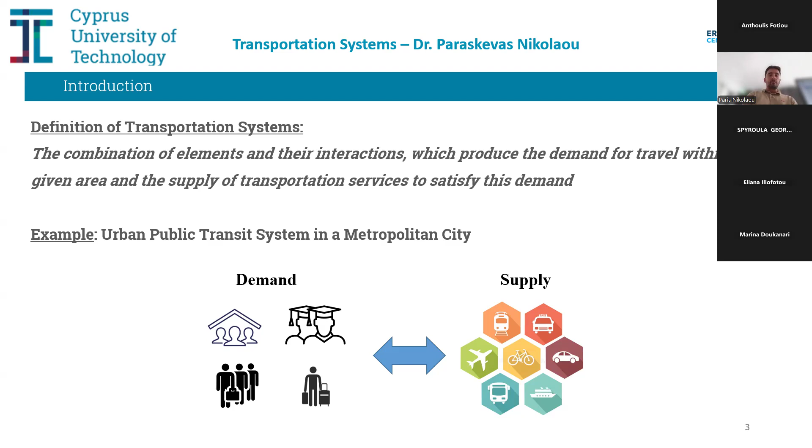So the elements of the transportation system are the commuters, the passengers of this specific transportation system, which are residents, students, tourists, and workers that desire to make a movement based on different purposes using the existing infrastructure and existing alternative modes. So the interaction between the demand for commuting and the supply of commuting services is what makes up the entire transportation system.

So a transportation system provides the necessary connectivity that enhances the interaction between people and also goods. That facilitates the movement of people and the spreading of ideas. Advances in transportation technology have made a revolution in civilization as we know it. And since ancient times, cities have developed close to physical and available terrains in order to make commuting easier for them, especially close to rivers or coastlines, etc.

So what is the evolution of the transportation system? We'll focus from the 19th century and forward, where in the 19th century you have the Industrial Revolution, steam engine technology, where you have transportation over canals, transportation of goods and passengers. Then we have the construction of railways in the 1830s. And in the 1930s, we have the Great Depression, where the US stock market dropped, and we had the decrease of oil and petroleum, where automobiles were not able to move.

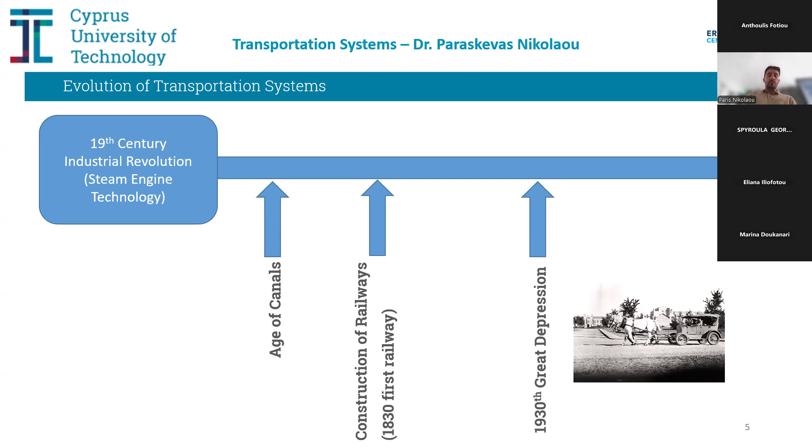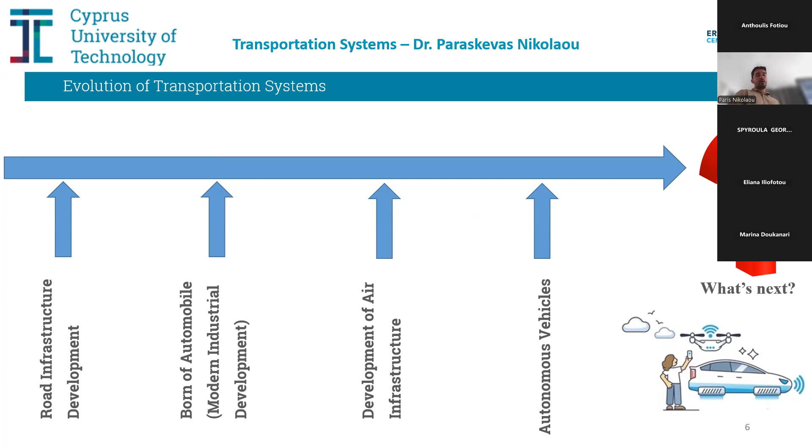So then we have further road infrastructure development, the birth of the automobile with modern industrial development, the development of air infrastructure, and autonomous vehicles. So following the evolution of the transportation system, we come to the question, what is the next step? As far as I know, in Dubai, I think they will implement a new transportation mode, which will be the mode of commuting passengers through drones.

So the dimensions of transportation: we have different dimensions of transportation, such as historical dimensions, where actually, as we mentioned, civilization evolved through the evolution of transportation systems. Economic dimension of transportation, where we have transport and economic development, which are highly related.

Social dimension, where now through the transportation systems, we have access to healthcare, welfare, and cultural events. Political dimension of transportation: it's important to also mention that during the presidency, we had one hot topic, which was the transportation problem in Cyprus. Environmental dimension, where as we know, the European Union has some regulations, some limitations on the emissions through the transportation system, which is also important to notice.

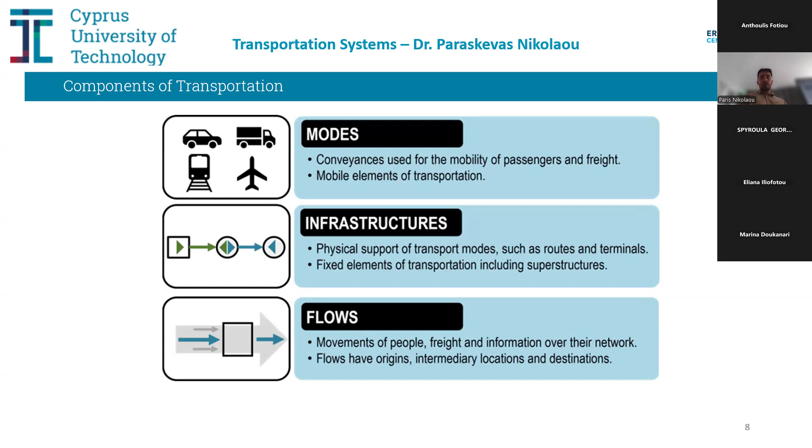The components of the transportation system: as I mentioned in the beginning, we have the modes, the alternative modes that exist in different locations, the infrastructure, the networks, the railway, the road network, etc., and the flows, which combine the movement of people and goods throughout the entire transportation system.

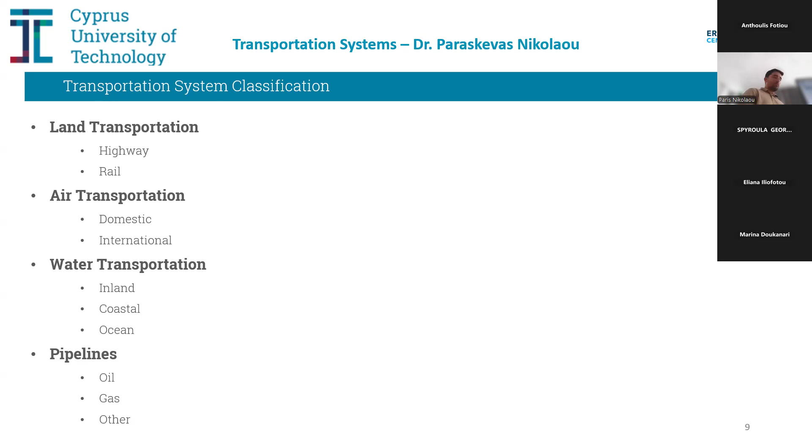The classification of the transportation system: we have different types of transportation system, which combine land transportation, air transportation, water transportation, and lastly, but also important, the pipelines, which are also considered part of the transportation system, transporting oil, gas, and other materials.

So one of the characterizations that I can say for the transportation system is that besides the modes, the different infrastructure, and the kind of objects that we transport, either people or objects, we have also the scale of the transportation system, which is urban, regional, intercity, and international, the transportation of freight and passengers, and also whether we have private ownership of the transportation system, or public, or even joint between private and public ownership.

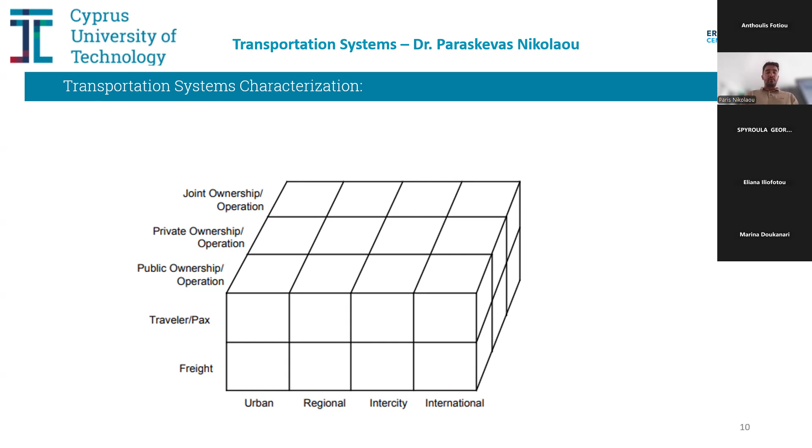An example here: the public transportation system in Cyprus, where the operators are actually private ownership, but they follow the framework that the Ministry of Transport has made for them.

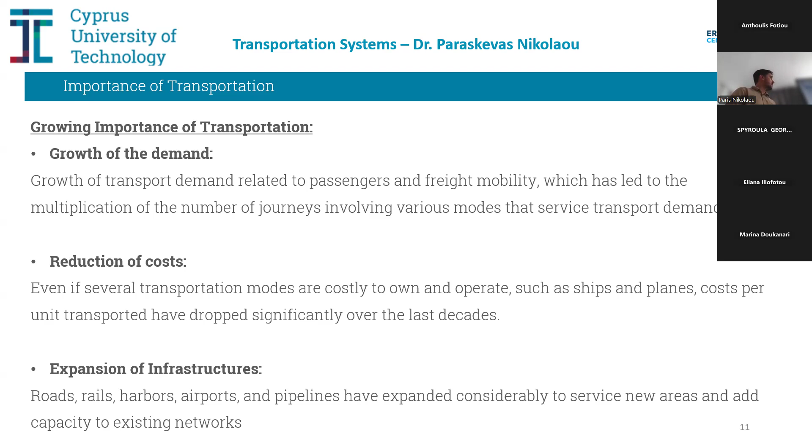So the importance of the transportation system is that growing demand is related with the growth of transportation, as many people desire to move. So we are in the position to make an evolution of the transportation system in order to fulfill the existing demand or future estimated demand. The reduction of cost using transportation modes, for example public transportation, helps us reduce our cost in contrast to using our private vehicles. And also the expansion of infrastructure, which is also a growing importance of transportation.

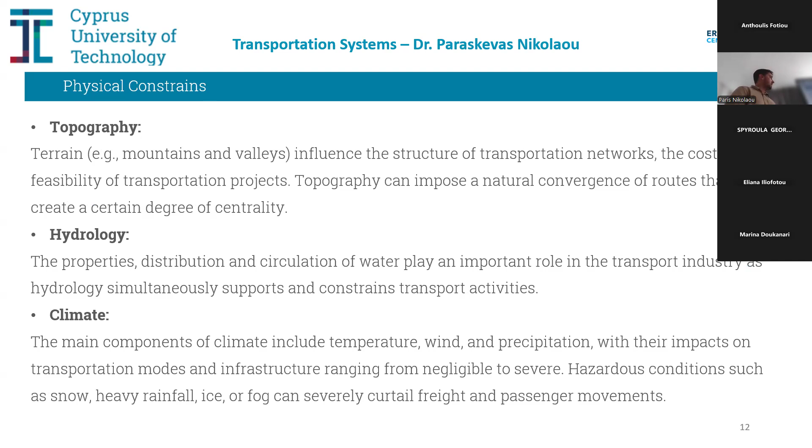So what are the physical constraints of transportation systems? The main constraints are considered as topography, where we have the terrain. For example, difficult terrains make the infrastructure of the transportation system more difficult to construct. Hydrology constraints and climate constraints.

What are the types of the transportation system? As I mentioned before, we have the public transportation system, the rail transportation system, urban, airway, freight, pipeline, intelligent transportation system, sustainable, resilient, autonomous, and space transportation systems. So as I mentioned, today we'll focus mainly on public transportation, also the intelligent transportation systems, the resilient, and the space transportation systems.

Public transportation is the provision of modes that are considered either public or joint ownership, which are provided to people in order to make their commute from different locations to different destinations. So the consideration of the public transportation system started from the demand for movement.

This specific system was enhanced during the years when we noticed that people moved from rural areas to urban areas, specifically when the secondary and tertiary sectors increased, manufacturing and other services in the urban areas. So people moved in order to find work in the urban areas, and this phenomenon is called urbanization. From urbanization began the demand for providing these people the ability and the mode for commuting. So we started to further study the public transportation system.

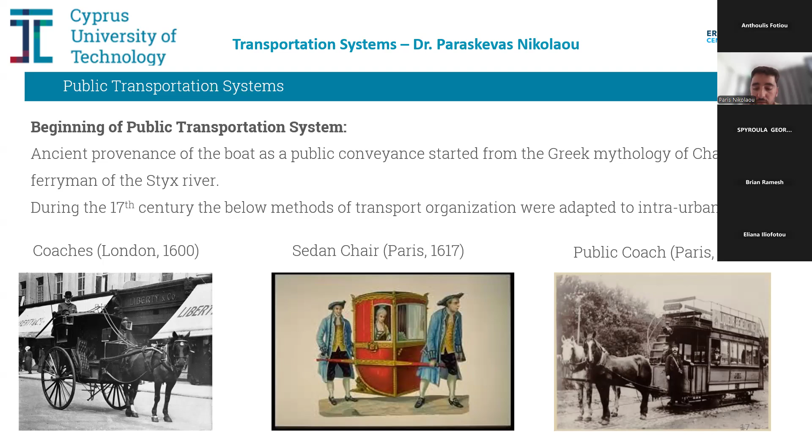We have the coaches in London at the beginning of the 17th century. Then we have the sedan chair in Paris in 1617. And also we have the public coach in Paris in 1662. So the evolution of the public transportation system is another topic that actually was considerable over the years.

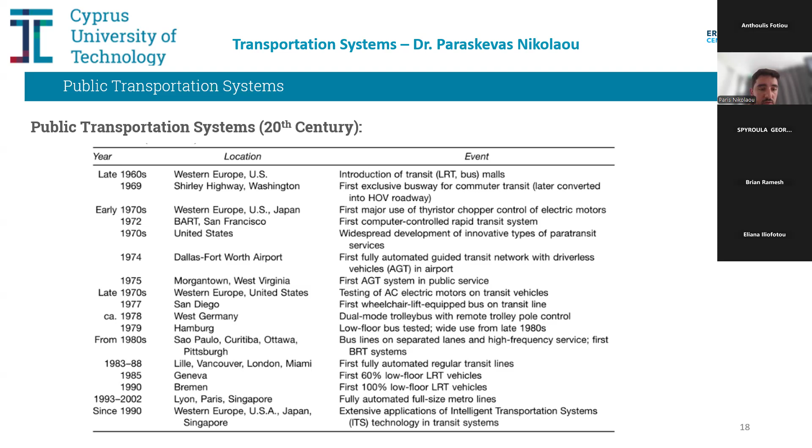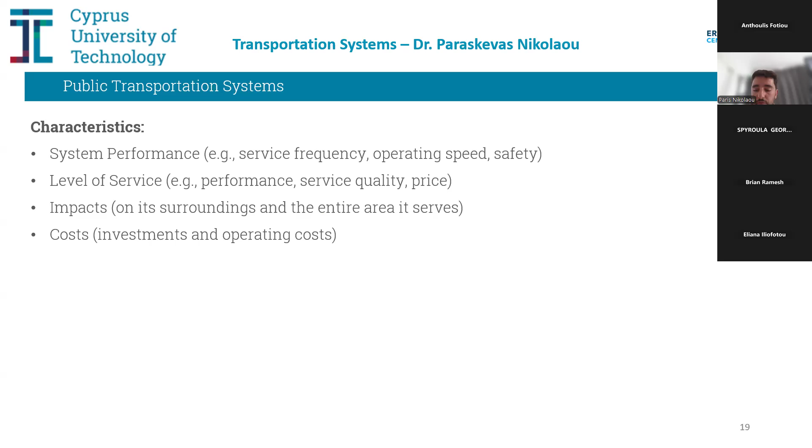So the characteristics of the public transportation system are that we have the system performance, which we measure by using service frequency, operating speed, and safety. We have the level of service, which characterizes the performance of the public transportation system: the service quality, the price. We have the impacts that the public transportation system provides over the surrounding area that it serves, and the cost, which is considered as the investments and the operating costs of the operators of the public transportation system.

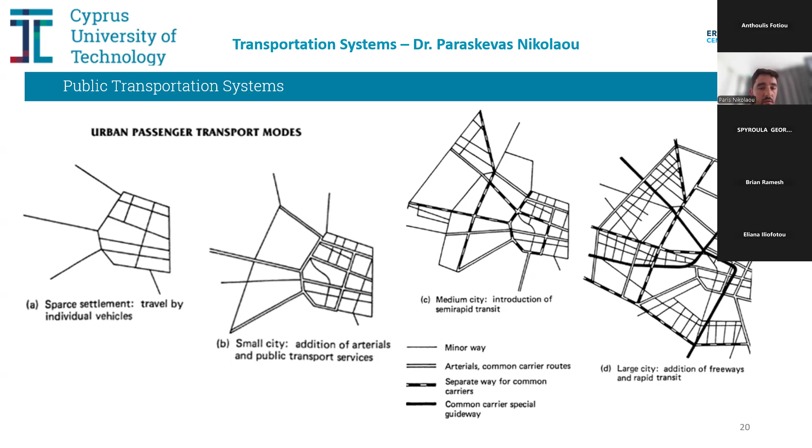Then we move to medium cities, where we have the introduction of semi-rapid transit. Semi-rapid transit can be the BRT, the bus rapid transit. And also to the large cities, where the population densities have increased, and so we have the addition of freeways and the rapid transit, which can be considered as the subways.

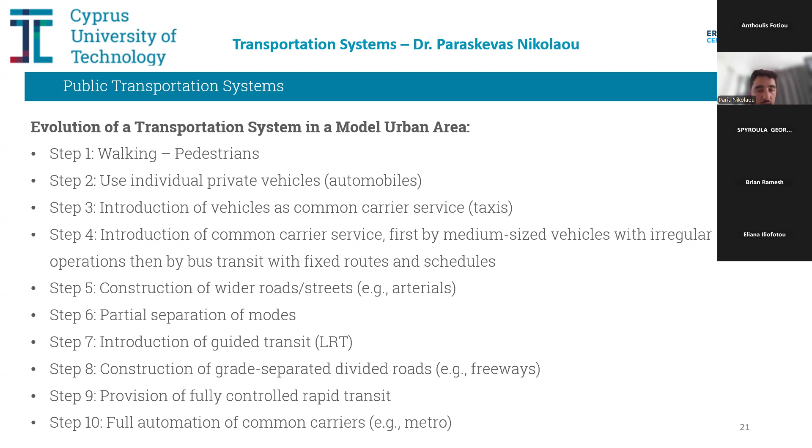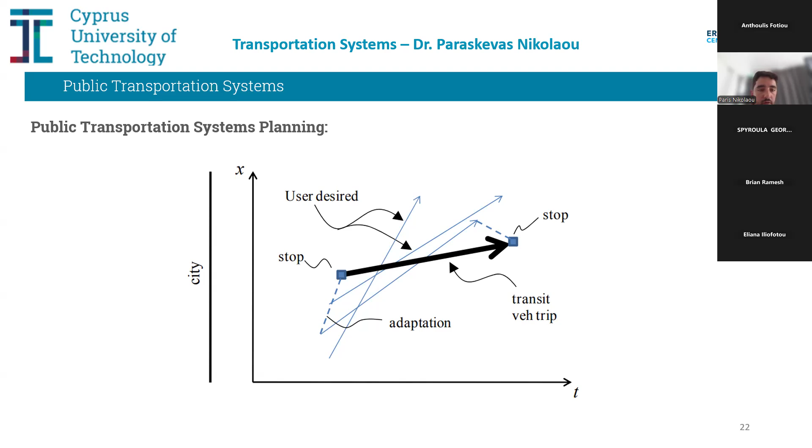So the thick line represents the existing public transportation system that commutes from one location, which is a stop, to another location, which is another stop. So the concept here when designing a public transportation system is that we need to adapt the existing desire, the existing demand, to the supply that we have, or even expand our supply in order to fulfill the demand. We need an equilibrium between demand and supply. So this is a concept that we have during the planning of public transportation systems.

The KPIs that we use, the key performance indicators that we use in order to either evaluate the existing transportation system or to proceed with planning a new public transportation system. Some indicative KPIs are the distance between stops. In most of the cases we use as a distance, actually it's also based on the population densities, but in some cases we use 250 meters to 400 meters, etc.

We have the coverage of the areas from the routes. It's important that the routes are actually passing through areas in order to provide the cover. The deviation from main routes, the route's length, the coverage between the routes, the frequency, which is also very important, the number of passengers, the compliance with the scheduled routes.

And if I had to add another KPI, it would be the information to the people, which proved to be very significant, especially in the case of Cyprus, where people do not have the information of the public transportation system, the routes and the times. So this will be an indicative KPI in order to efficiently evaluate existing public transport.

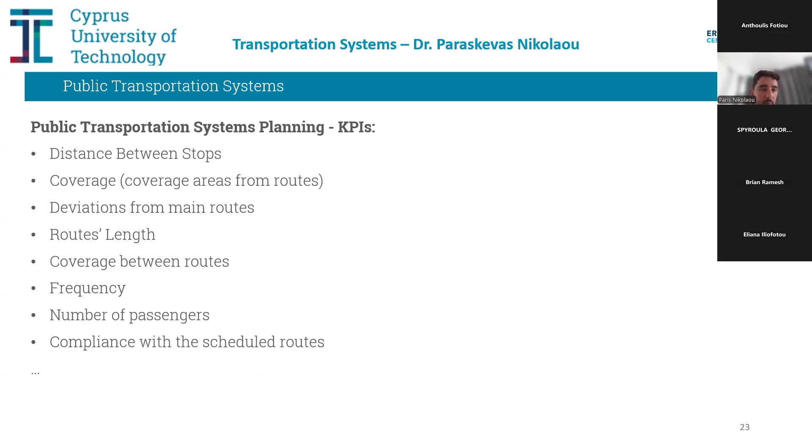So what are the arguments for supporting public transportation system? Equity. Equity actually is a new term that we use for the last 10 years for the public transportation system. It's actually the provision of access to the people who cannot use alternative modes.

The congestion: many people actually prefer the public transportation system compared to a private vehicle, for example, in order to avoid congestion. But for the case of Cyprus, this is not an argument because we don't have BRT, the bus rapid transit. So congestion is something that the public transport also faces during peak hours. So land use influence for the public transportation is necessary but not sufficient to change land use.

Environmental arguments, which we all know, that the environmental outcome from using public transportation system is efficient compared to using private vehicles. The energy, many more. The other arguments that we also use because we have some issues, for example, accidents, impact on human health, congestion, noise, and global warming, which have an external cost to the local authorities and to the transport in cities.

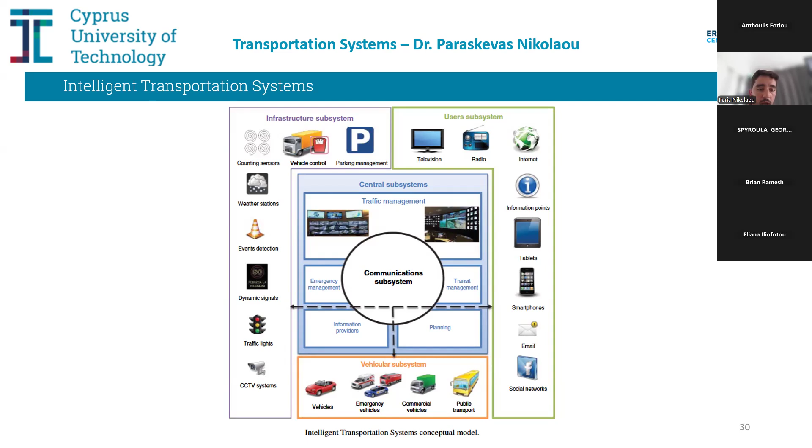So ITS is essential for providing comfort, travel time saving by reducing the number of unwanted stops, or by reducing waiting time. For example, we all use Google Maps as a part of ITS, which provides us best routes for minimizing travel time. Road safety, which actually provides controlling speed of vehicles.

We have also smart cameras in the signalized intersections, which are also providing efficient measures for road safety. And also ITS provides further improvements in management and environment control.

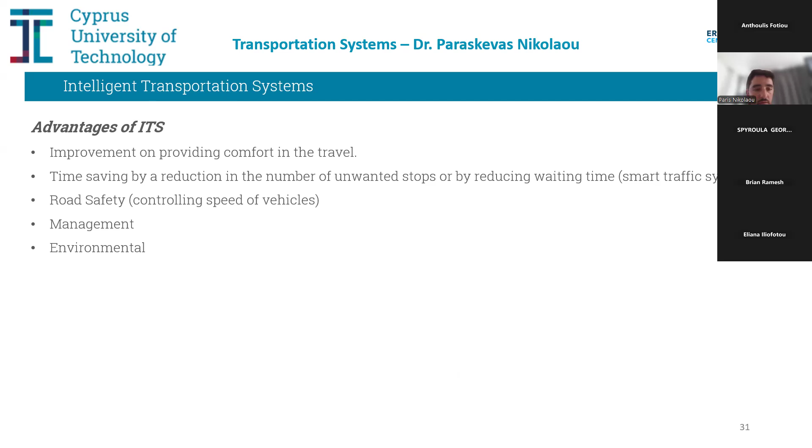So the next transportation system that I will speak about today, I think it's also of interest to Eratosthenes, is the resilience of transportation systems. For those who are not familiar, resilience is defined as the ability to withstand and maintain a certain level of functionality of performances compared to their reference regular planned level during the impact of disruptive events, and to recover reasonably rapidly afterwards. We will see in the next slides what disruptions we have.

So consider that the infrastructure, let's say the road network, has a specific operational level. Then we have the disruption, for example a storm, and we have a failure of a specific segment of the road network. So this disruption has an impact that takes time, and also at this time we need to recover and come back to the operational level that we initially were.

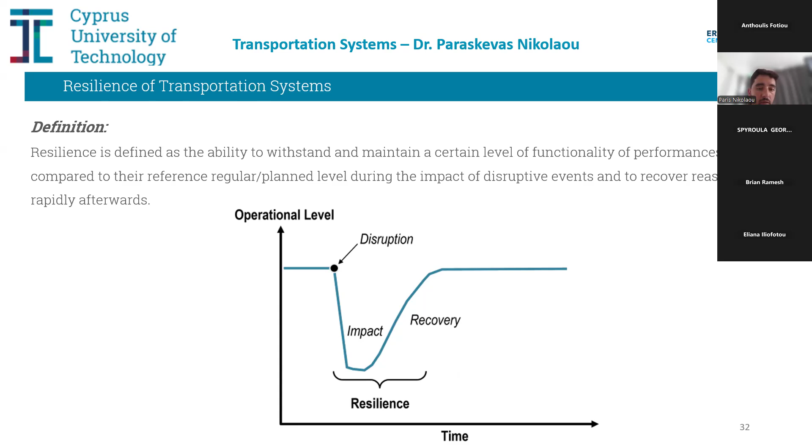So the resilience is considered as the time from the impact of the disruption up to the recovery, in order to come back to the operational level that we were. In order to study resilience, it is important to see all the performances of the transportation system and all the components of the transportation system in order to take them under consideration.

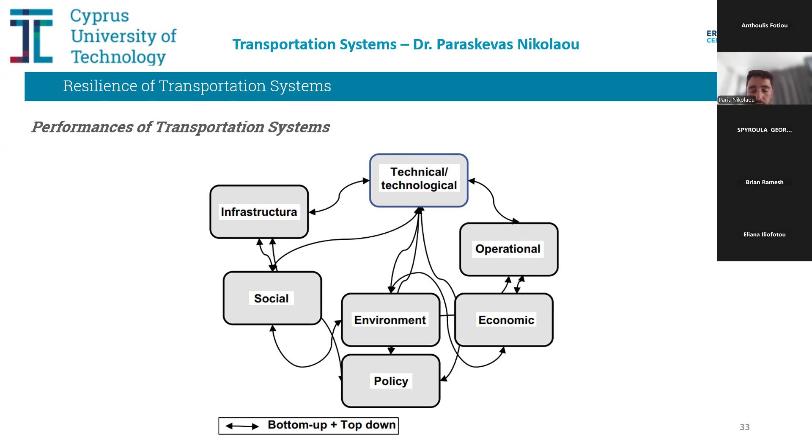So disruptive events are considered either internal or external, which may affect the planned regular functionality of performance of the transport modes and their system, and also the specific infrastructure, the safety and security of persons and goods and properties, both internally and at the surrounding communities and the environment.

So some external disruptive events are severe weather, climate change, natural disasters, terrorist threats and attacks, cyber attacks, epidemic and pandemic diseases. And before going to the internal events, for the external disruptive events, we have an example of disruptive events

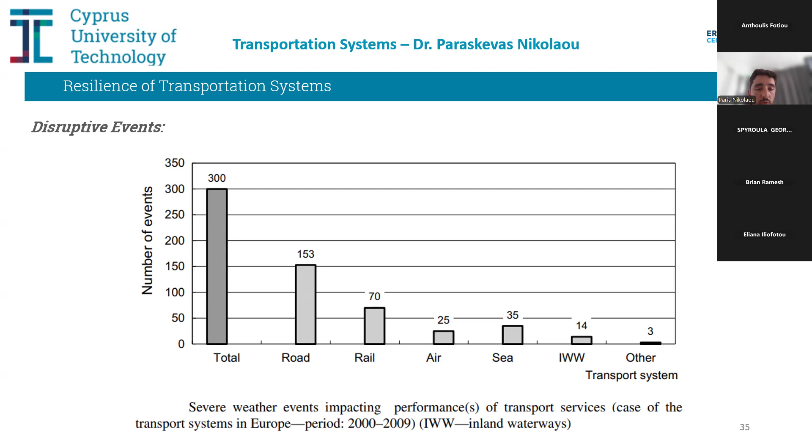from severe weather, where you can see that inside Europe from 2000 to 2009, we had a total of 300 disruptive events from severe weather, of which 153 were on the road network, then on the rail, on the sea, on the air, on the inland waterways, and other transport systems.

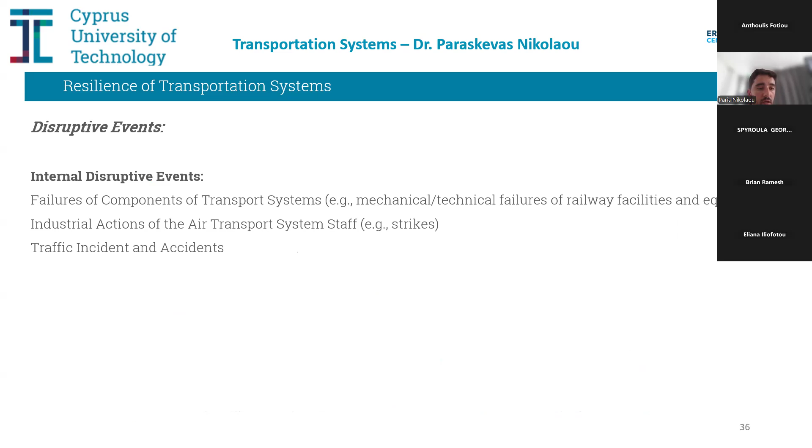So for the internal disruptive events, we have the failures of components of transport systems, where we have mechanical failures, for example, of railway facilities. We have the industrial actions of the air transport system staff, where we have the strikes, and the traffic incidents and accidents, which is actually a topic under my research interest right now.

So the metrics that we have for measuring the resilience of the transportation system are the performance indicators. As we mentioned, also for the public transportation system, we have some KPIs that are used over time in order to see how resilient the system is. The recovery time: the objective here is to minimize the recovery time, so it's important to notice this specific factor. The network characteristics, the type of network and the extent of preparedness, and the transport modeling.